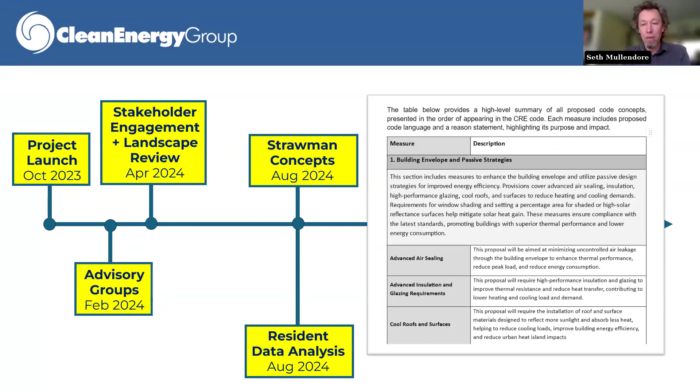We used all the information that we had, as well as that engagement with affordable housing residents, to put together straw man concepts. New Buildings Institute led this as well, and put together basically a list of all the things that we could include in the code, why it would be included, what that would look like, to share with our advisory group members and the project team to narrow it down for what we were going to include in the draft version of the code. So throughout that process, we got feedback, refined that, and that resulted in an initial version of the draft code in November of last year.

And part of that process was making sure that we had taken the resident feedback into consideration with the straw man concept and the draft code. Operation Fuel engaged in another round of engagement with affordable housing residents through a number of listening sessions. There was a report released in March that has the takeaways from that. After I hand things over to Tristan to dig into the content of the code, I'll circle back to this to give you a little bit of an idea of the results. This is available on our website, as are the other reports.

Also, using the draft code and the measures, we did a number of impact analyses to look at the energy usage impacts, the cost impacts, as well as the resilience impacts of these measures. I'll return to that after turning it over to Tristan to give you a little bit of a glimpse on that.

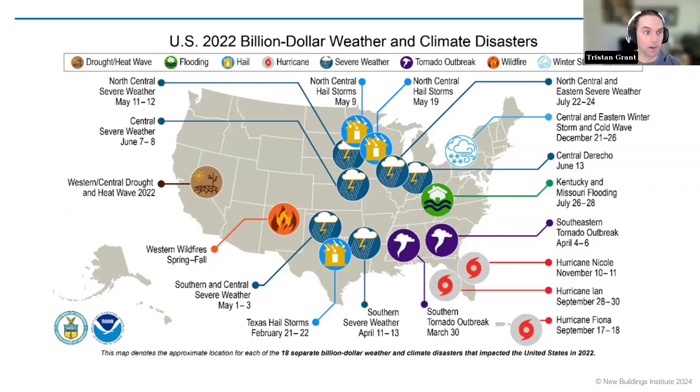The framework of this code was structured as an overlay to the International Residential, International Building, and International Energy Conservation codes. These touch both the residential codes as well as the commercial codes. Any multifamily buildings that are 4 stories or more get permitted under the commercial energy and building codes. And so the code is structured with 2 parallel pathways of amendments that impact both commercially permitted residential buildings and residentially permitted residential buildings.

We have not gotten to the ASHRAE amendments yet, but we do plan to create another parallel set of code amendments that cover ASHRAE 90.1 and commercial buildings that follow that energy code pathway. In addition to this, there are some guides and resources that will be published with the code to help project teams understand and navigate this, including resident manuals. Next slide.

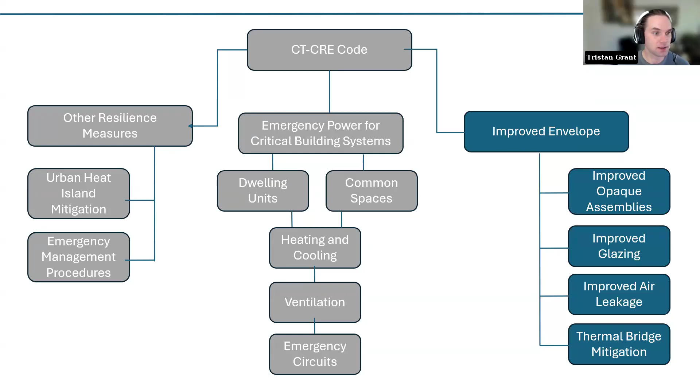There's been a lot of research that shows how the Passive House standards perform in a range of environmental conditions, and research into the cost. And we're really talking about relatively small incremental cost increases that have a pretty significant impact on a building's ability to maintain habitable conditions. That helps in the event of a power outage. That also just helps conserve energy and conserve cost during normal operations. Next slide.

Okay, this slide's got a lot going on. What this is showing is research that existed before we started our project, but that we leaned on and looked to heavily to justify why Passive House is an appropriate place to look to for code requirements.

And what this is comparing is buildings modeled to the Passive House standard, buildings modeled to the ASHRAE code standard, and how those buildings are able to maintain temperature over a period of time during a simulated grid outage. They have this at different orientations of the building and different window to wall ratios. If you can click 3 times. Yeah, twice more.

There we go. Okay, so looking at this for 2 orientations and at 1 temperature difference, you can see the top 2 red rectangles highlight the southwest orientation, Passive House, and ASHRAE buildings at 20% window to wall ratio, and it shows the percent of hours during a 7-day simulation that are above the temperature threshold. This temperature threshold that has the blue rectangle around it is 50 degrees Fahrenheit.

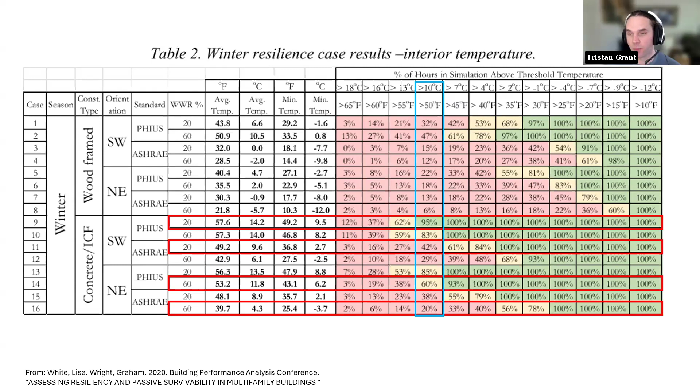And you can see during this simulated grid outage, the Passive House building had 95% of the hours above 50 degrees. The ASHRAE building had 42% of hours above 50 degrees. That's a pretty significant difference. And we're seeing something similar with the 60% window to wall ratio with a northeast orientation, about a 40% difference in the number of simulation hours that are above that temperature threshold. Next slide.

And so when we went out, Pacific Northwest National Laboratory was also a partner on this project and helped us establish some metrics by which we evaluated the passive performance of our code. We looked at standard effective temperature, which is a metric that incorporates a number of conditions into a temperature value to represent interior temperature conditions and how people experience that.

We set the thresholds at 54 degrees for heating and 86 degrees for cooling. This is based on a LEED pilot credit that establishes a maximum number of SET degree hours that a project needs to stay below during a simulated grid outage event in order to qualify for the LEED credit. And this is just one way that we were evaluating the improvements to the passive building envelope design for our code.

We looked at model prototype buildings for low rise, mid rise, and high rise under 3 and 7 day simulated grid outages during extreme heat and extreme cold weather events to see how the passive measures performed. Next slide. Next slide, please.

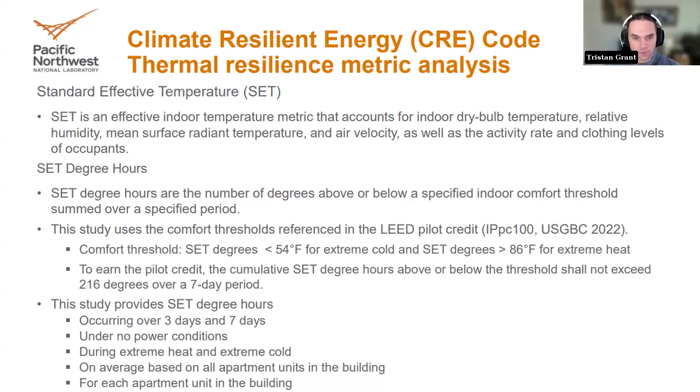And the reason for that is that it turns out when you increase insulation significantly, decrease air leakage, and optimize the envelope for an extreme cold scenario, there is some penalty on the extreme heat scenario because you're holding all of that heat inside the building. Next slide.

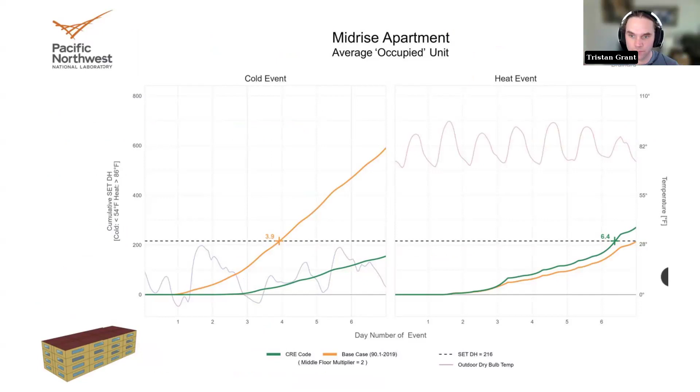Next slide. And to look at that in a little more detail, can you click a few times? I think I've got a couple more boxes here.

Yeah, here we go. Looking at the mid-rise, high-rise, and low-rise for the 3-day event, there was a reduction in SET degree hours by 94%, 54%, and 34% respectively. And you can see on the extreme heat side, there was a 10% penalty for the mid-rise and a 21% penalty for the low-rise for the extreme heat SET degree hours.

We were not too concerned about this for our code because you can see the SET degree hours in the extreme cold scenario were higher than the SET degree hours for the extreme heat scenario in all cases, which means that when it comes time to use this information to size the emergency power systems to provide power for critical systems during a grid outage, the extreme cold scenario is still going to be the design case, meaning that's our worst case condition that we're designing for.

And so even though there's a slight trade-off here, this shouldn't drive cost in the sizing and the provision of the emergency power system. Next slide.

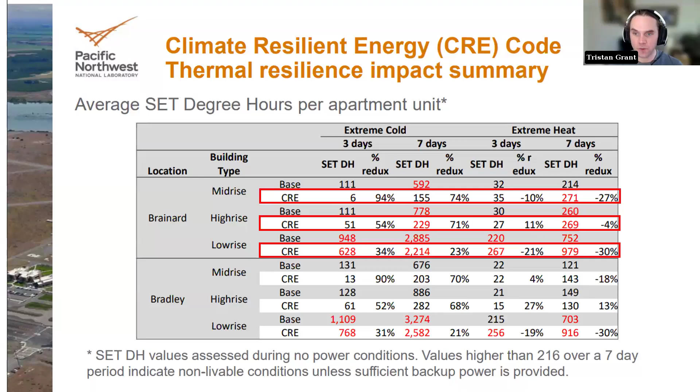Alrighty, so moving on from the passive envelope improvements, we get to the emergency power for critical building systems. We defined critical building systems as heating and cooling, ventilation, and emergency circuits. And we look at 2 approaches to providing those in a building: one where you provide those in all of the dwelling units, and one where you provide those in common spaces. Next slide.

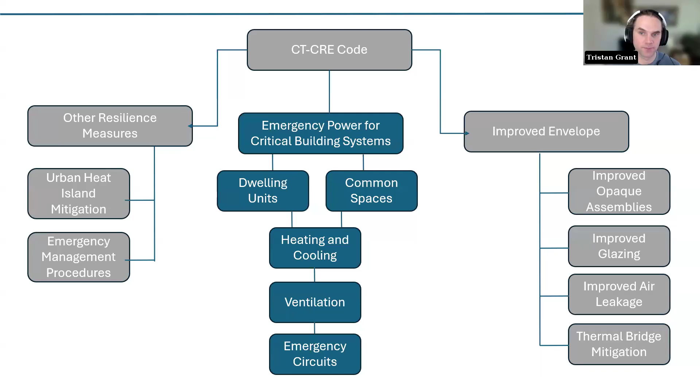So yeah, I mentioned heating and cooling, ventilation. The electrical circuits include outlets for medical devices and other devices, as well as power to pumps, where pumps are needed to deliver potable water to spaces in the building. And we looked at two pathways for how a project could comply with these requirements.

One is where they provide emergency power to emergency heating and cooling systems in dwelling units, and one where they set aside a certain amount of space in the building sufficient to house all the occupants in the event of a grid outage, and they provide heating, cooling, ventilation, and emergency circuits to that space, similar to a cool or warm room approach. There's various literature, resilience research on that approach.

And in both cases, we require a minimum amount of space to be set aside per occupant that has heating and cooling and service from associated systems provided to it. Next slide.

So the way that this language kind of flows down in the code is that we say you have to provide emergency power to heating and cooling systems, either distributed throughout the building in all of the dwelling units, or in a common space with I think 20 or 30 square feet per occupant, so that there's sufficient space to house everyone.

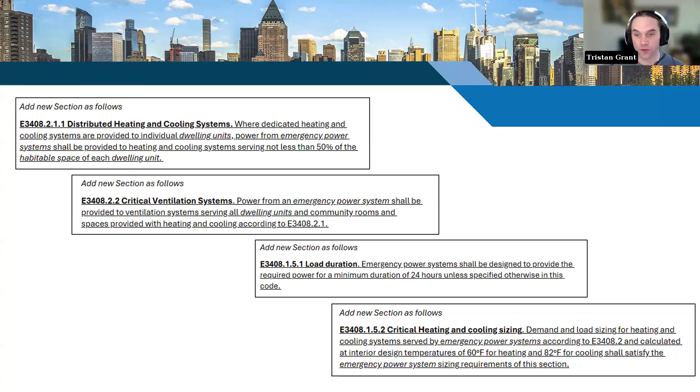The requirements then flow down from that, where emergency power is provided to heating and cooling according to that previous code section. You also have to provide ventilation, and you also have to provide emergency circuits. We then say that the sizing of the emergency power system needs to meet a load duration of 24 hours. And we have some allowances for how that sizing is calculated, because we also have certain controls requirements for the systems that are backed up. Next slide.

So for heating and cooling, we require smart thermostats and smart controls that are capable of automatic temperature setbacks in the event of a grid outage. For ventilation, we're requiring balanced energy and heat recovery, and we also require smart controls that are capable of automatic airflow reduction in the event of a grid outage. And for emergency circuits, we require load shedding capabilities if additional loads are backed up beyond those that are minimally required.

The main idea here is that we want to make sure that we're able to prolong and extend the period of time that emergency power can be provided as much as possible. And so, optimal interior temperature conditions are not necessarily the priority. The priority is habitable conditions. And so we want these systems to be capable of automatically setting back, reducing airflow, reducing energy usage during a grid outage event, so that we can provide habitable, livable conditions for as long as possible. Next slide.

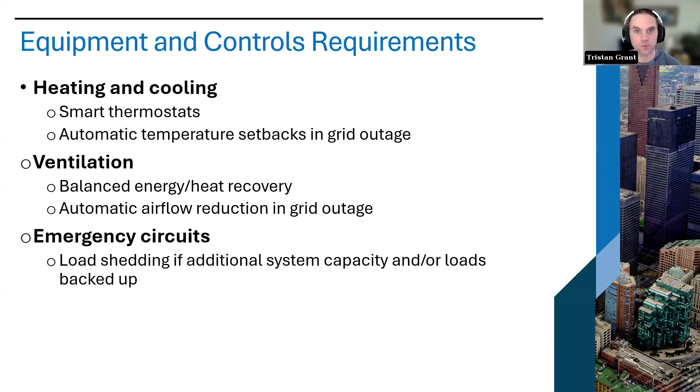I'm not going to get into this too much, but American Microgrid Solutions, the solar and storage and microgrid consultant, took the energy modeling results that PNNL helped us with and did a number of scenario analyses with solar and storage sizing to come up with some cost-effective solar and storage design sizing criteria that we incorporated into the code.

We set minimum solar and storage provisions based on this, but if those alone do not meet the sizing criteria, we do allow for hybrid systems. And the sizing criteria for the emergency power system is allowed to be calculated using the reduced loads based on the smart and dynamic controls that we require. Next slide.

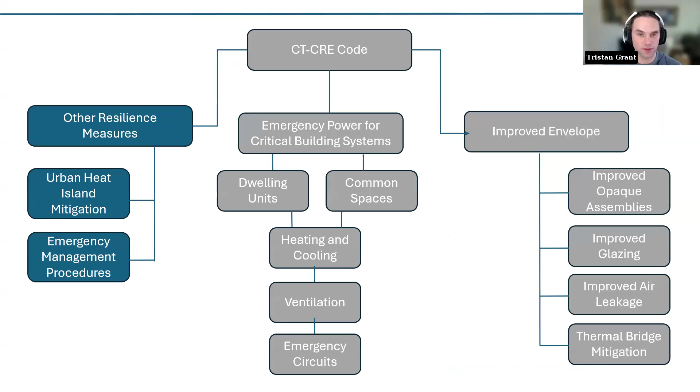Alrighty, so moving on to the other resilience measures. Next slide.

The project team and stakeholder groups felt it was appropriate to include urban heat island mitigation criteria. Extreme heat is a leading and growing natural hazard. It's a leading natural hazard cause of mortality. It contributes to lost worker productivity. It's associated with adverse health outcomes and adverse health costs. And it disproportionately impacts vulnerable populations.

And on top of all of that, it has a direct impact in how much energy buildings use for cooling during an extreme heat event. And so we felt it was appropriate to include those measures in the code to help improve performance during extreme heat events. Next slide.

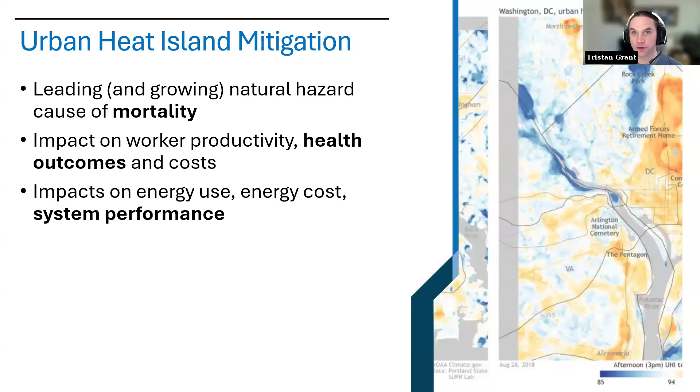And lastly, we set requirements for the development and provision of emergency operations and management procedures manuals that are developed and provided to both the ownership to deliver to building operations staff, but also specific manuals for the residents to understand how their behavior, how their decisions, how they operate the building during a grid outage has an impact on how long the systems and the emergency power systems stay on during a grid outage.

And so this is reflecting the role that behavior can have on real world performance in a grid outage event. It also provides best practices for emergency management of building systems and also resources to community networks and things like that that can help community members respond during extreme weather events. And I think that's it for my portion.

Great, thank you, Tristan. I've got I think 3 more slides here to go through before we open it up for question and answer. I'm just going to briefly touch on the additional reports that we put out with this, the preliminary impact assessment results. So in order to get a sense of how the implementation of this code actually would impact buildings in practice,

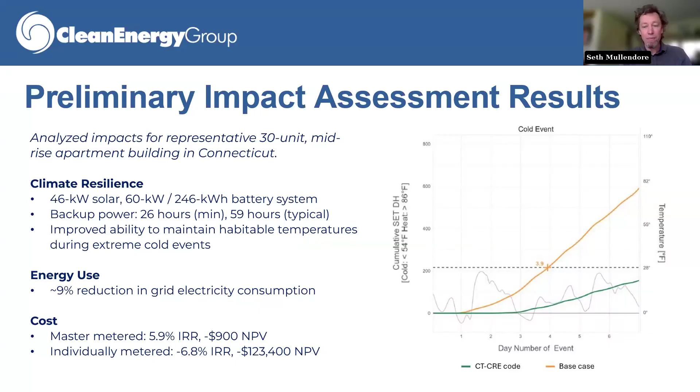Also, master metered had more ability to reduce some of their demand-related utility charges, just because they had higher utility bills, having more on one meter. The impact report gets into all the details of that. Doreen, if you could go to the next slide, please.